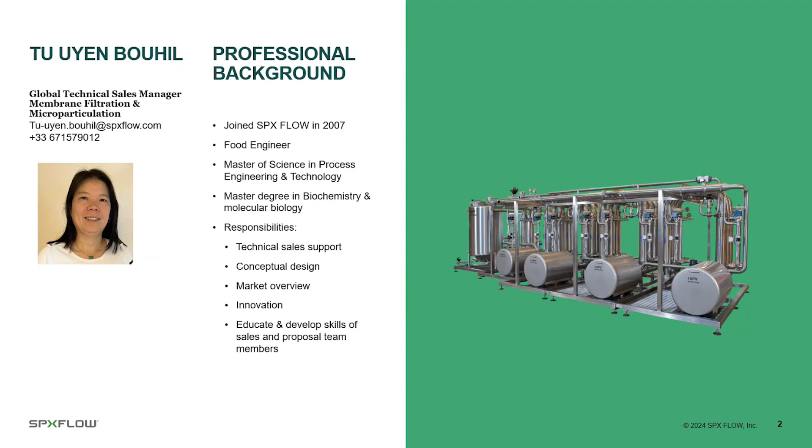So let's get started with a discussion on revolutionizing your dairy production with advanced milk fractionation. Our purpose at SPX Flow is to improve the world through innovative and sustainable solutions.

Today's agenda: we will have a quick overview of the milk ingredients market forecast from 2020 to 2025, ways to produce milk ingredients, why and how we will use milk fractionation to obtain flexibility to innovate and improve your recipes, key drivers for dry and wet ingredients, and finally, the SPX Flow fractionation solution.

At SPX Flow, we understand that quality, cost, and sustainability are the primary drivers for you as big players in the dairy industry. Our milk fractionation technology offers a complete end-to-end solution, creating lean and green manufacturing by reducing cost, materials, downtime, and utilities, by improving plant consolidation with optimization of the process, scaling production with fewer lines, by increasing production equipment flexibility, and by reducing and improving the wastewater stream.

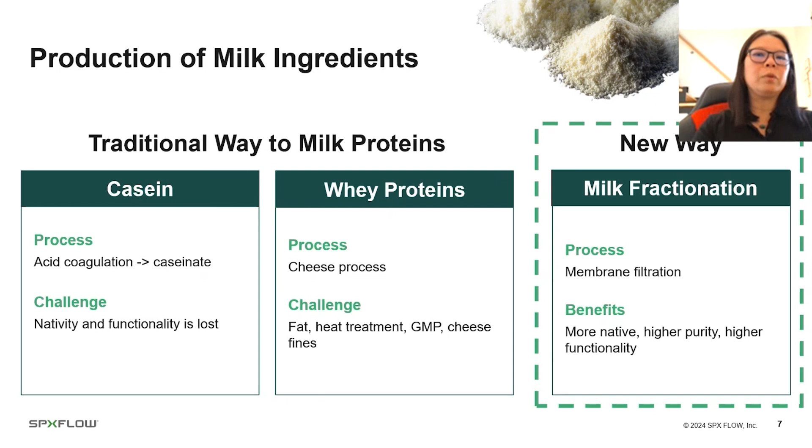With this new way to proceed, you will get fantastic benefits as it is a native form with higher purity, functionality, and is more digestible. Of course, this gentle way offers great advantages compared to the traditional methods. But it is not the only one that you can achieve with membrane filtration. We can mention the top 5 reasons why investing in milk fractionation is the most important thing for future dairy manufacturers.

Primarily is diversification. Milk fractionation allows you to produce a range of value-add products with the same equipment. Thus, a broader portfolio helps meet the various preferences of consumers and opens new market opportunities.

Secondly is increased profit. Milk fractionation adds value to the milk by creating higher margin products. Thirdly is enhanced competitiveness. Milk fractionation enables you to differentiate yourself from competitors by offering unique and customized products. Being proactive to market trends helps you gain a competitive edge in the market.

Fourthly is better utilization. Fractionation allows you to efficiently valorize milk to the last drop. This minimizes waste and maximizes resource utilization, leading to cost savings and improved sustainability.

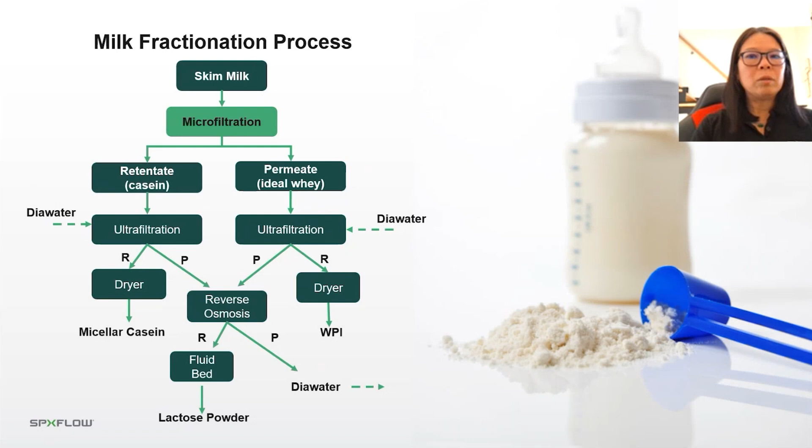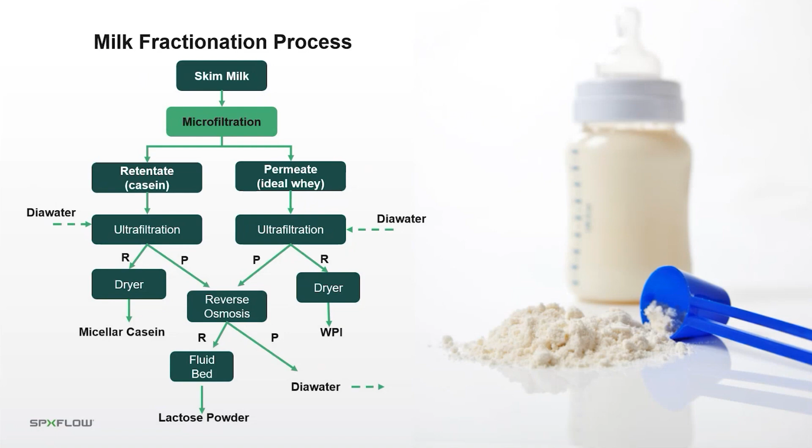The next step is to reach the target concentration level and purity with ultrafiltration. Milk ingredients such as micellar casein, milk whey protein isolate, and lactose can be manufactured in both wet and dry forms. How is milk fractionation possible?

Liquid milk and whey are suitable for the membrane filtration process thanks to their low viscosity, high water content, and because they used to be high volume bulk materials.

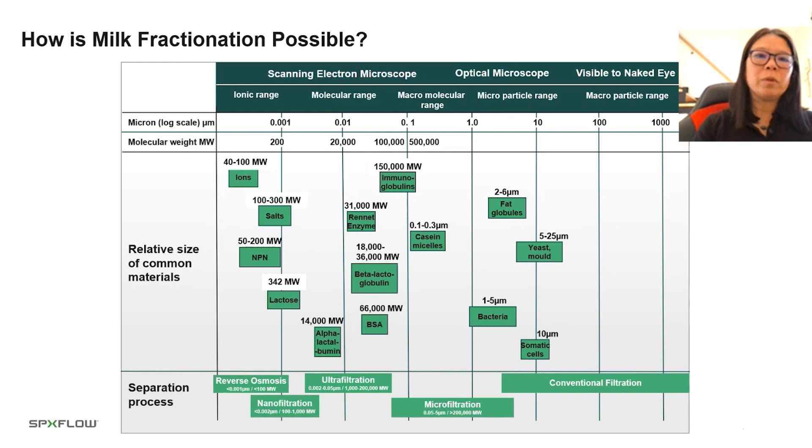The milk components can be easily fractionated due to their size. You have small molecules or ions like minerals and lactose, large molecules or proteins including calcium phosphate, and microparticles or fat globules, somatic cells, bacteria, or large aggregates. The membrane pore size falls within 4 main categories: reverse osmosis, nanofiltration, ultrafiltration, and microfiltration.

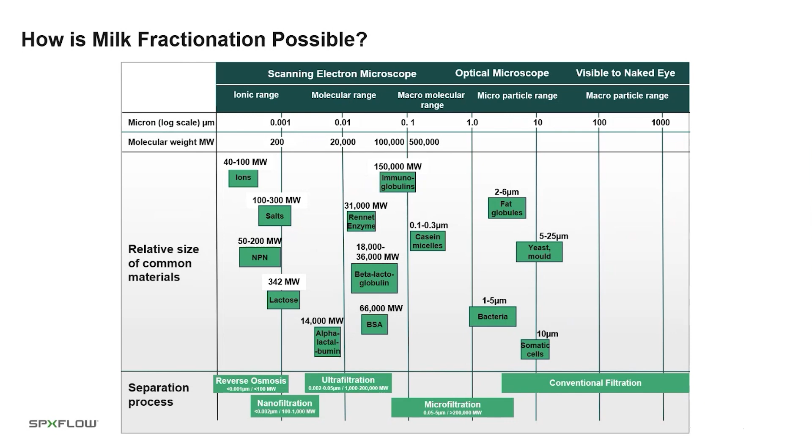So with membrane filtration, we can separate milk and whey components into smaller fractions. Each fraction can be used as a building block for new and innovative recipes. How does it work exactly?

Fundamentally, membrane filtration is a pressure-driven technology that uses specific membranes with different pore sizes. The pore size is indicated by a cutoff value for a particular membrane. In order of increasing pore size, membrane filtration methods include 4 technologies: reverse osmosis, nanofiltration, ultrafiltration, and microfiltration.

Reverse osmosis is for concentration of virtually all suspended and dissolved matter. Nanofiltration is for concentration of virtually all suspended and most dissolved matter. Ultrafiltration is for concentration of suspended proteins and fat. Microfiltration is for concentration of bacteria, fat globules, and large protein aggregates.

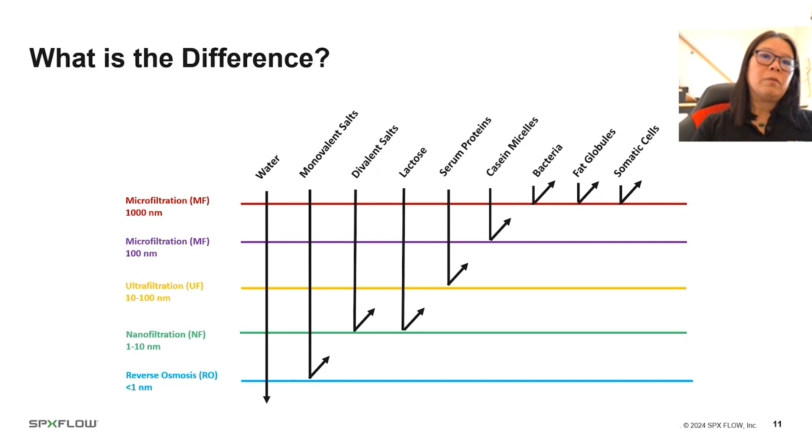As you can see, for the main milk components, membranes are usually in the ultrafiltration range. The ultrafiltration cutoff value allows components such as lactose, lactic acid, and dissolved minerals to pass through the membranes as fat and proteins are concentrated.

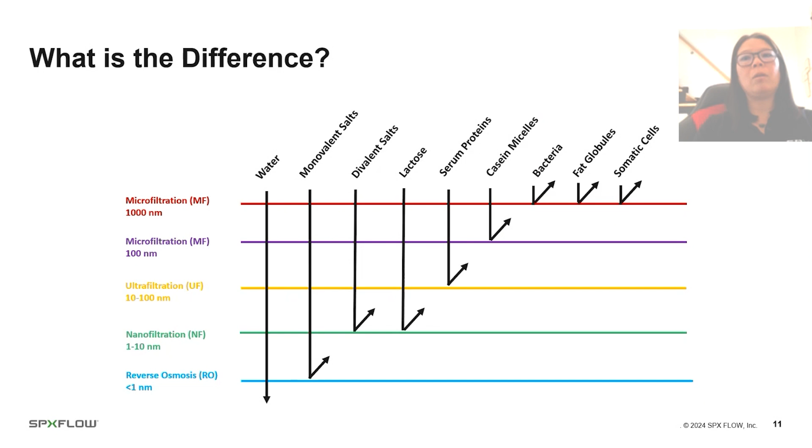To go further in this valorization, functionalization is also essential to unlock the full potential of your milk components. By modifying the functional groups of milk molecules, we can develop new properties and behaviors, opening a world of new application and innovation, such as being used to improve the texture, stability, and flavor of food products.

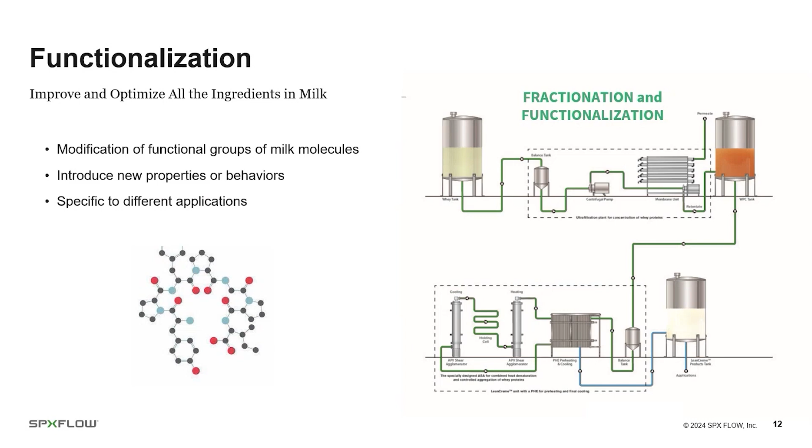Microparticulation will bring functional properties used for dairy and food products, such as a creamy mouthfeel particularly in low-fat products, water binding, improved texture and viscosity, excellent emulsification properties, stabilizer properties, and of course high nutritional value.

In order to stay ahead of this growth and take advantage of new opportunities, dairy producers are continually seeking flexible and innovative ways of making clean label products that are more sophisticated without compromising on taste and feel. It is the reason why SPX Flow innovates with a new concept of milk fractionation solutions that provide customers with a versatile solution to meet market change and the competitive landscape.

With this multidimensional approach, SPX offers you a very flexible production tool that can adapt its output according to current needs, but also for future development. SPX Flow's strength is also the ability to provide end-to-end processes and to boost a wider portfolio.

By the functionalization of the end products derived from this fractionation process, as casein, which can be used for cheese or yogurt, whey proteins which can be microparticulated and used in cheese and high protein products, lactose to make lactose powder or GOS, until the last drop as salt, minerals to make sport drinks.

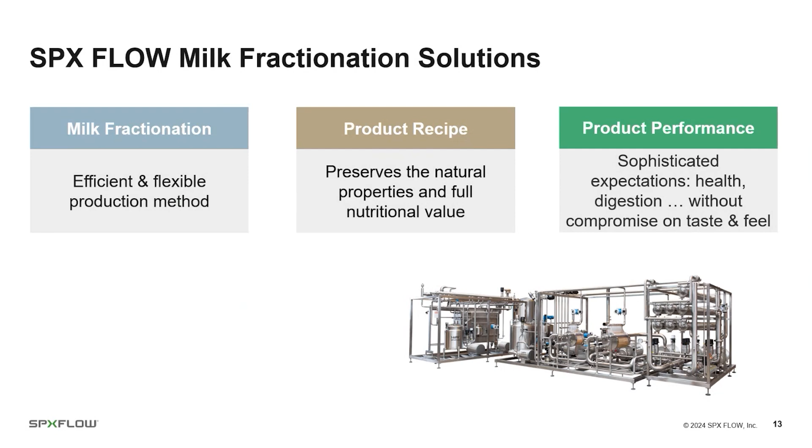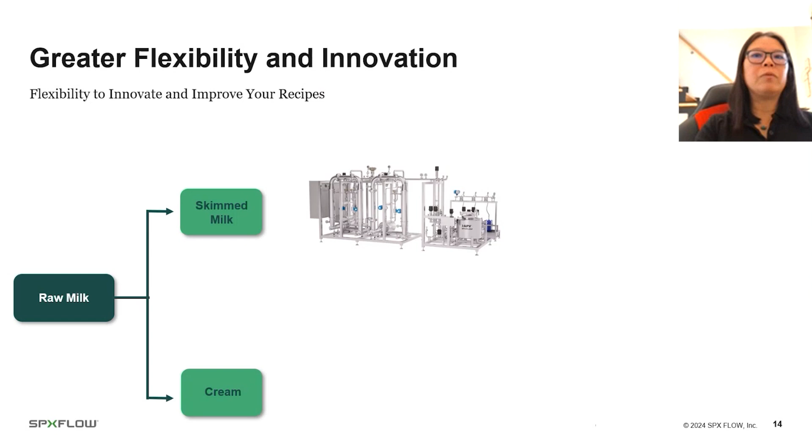So using advanced membrane technology to fractionate and concentrate the milk's native components preserves the whole proteins, which allows us to maintain higher quality protein content while preserving the natural properties and full nutritional value.

This separation of milk components allows for the customization of a range of dairy products, creating a new world of possibility for you, and can be used in various food applications including sport nutrition, infant formula, and functional foods. By efficiently utilizing each component, you can tap into previously untapped markets.

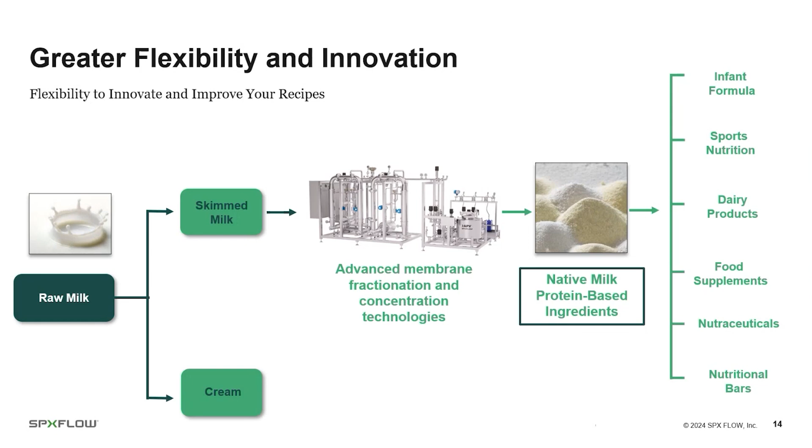As mentioned earlier, milk ingredients can be manufactured in both wet and dry form. Key drivers for dry form include long shelf life of 8 to 12 months, reduced transportation volume, usable in distant locations from the production site, less storage space for large quantities, simplified storage with no need for large aseptic space and lower building cost, balancing seasonal production differences, new market opportunities in homes and factories, suitable for retail pack and institutional sales, and dry mixing and over-customization options available.

On the other hand, wet ingredients also have a lot of benefits, like quality and functionality by simplifying process, improving fresh taste, and getting lean CapEx and OpEx. This means better functionality for end application, better quality control, tailor-made end product, clean label, and specific nutritional value.

We can also have cost optimization. Using fresh, wet ingredients rather than buying or importing powder at higher cost can save from 15 up to 40% in your formulation, giving an innovative product with the perfect combination of taste and functionality.

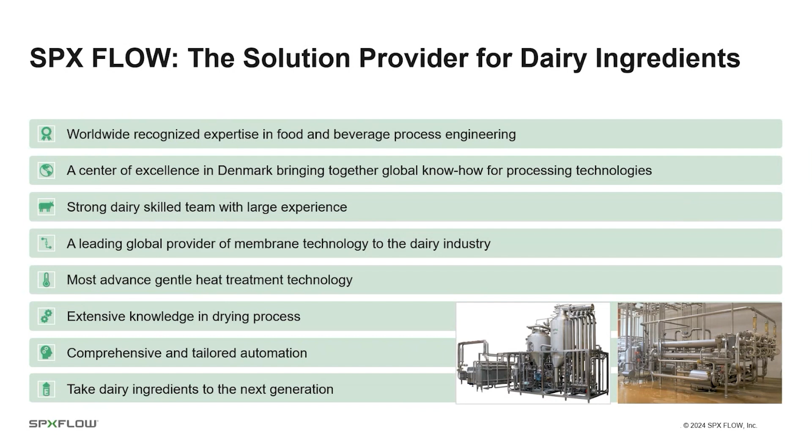Combined with our comprehensive and tailored automation, SPX Flow can support you to build a relevant and consistent solution end-to-end process. SPX provides all key technology for end applications, like UHT, evaporation, homogenization, spray and fluid bed dryers, mixers, valves, and pumps. These components are supported by SPX Flow's full lifecycle approach concerning services and spare parts.

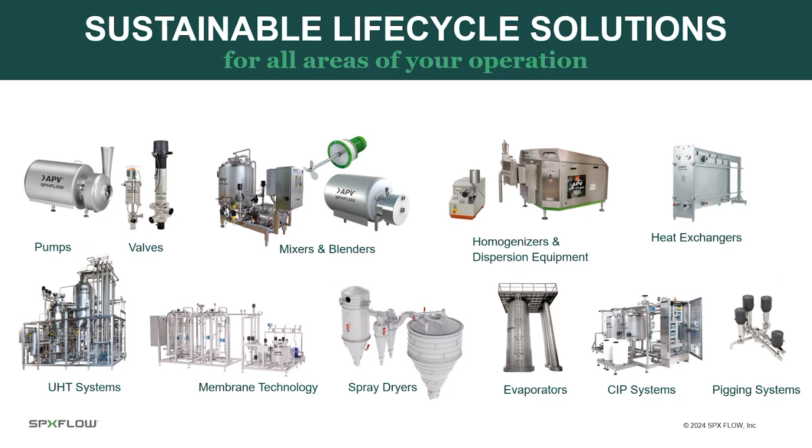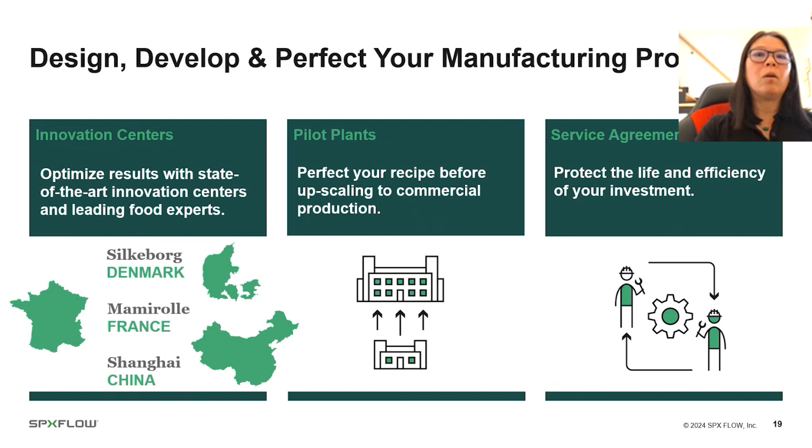We welcome you to our facilities to try new recipes, or in many cases, you can rent equipment from these facilities to test in your own factories and labs. Of course, we can also test liquid food, plant-based in this case, for example.

Our recent success story on this slide represents both possibilities, wet and dry ingredients, produced by SPX Flow milk fractionation solution.

Case story 1: a global leader in Spain, with a capacity of 1,340 tons per day of skim milk. With the fractionation process, they get dry product with MPC 60, MCI, WPI, lactose, and regenerate water through the process to be reused as Diawater and CIP water.

Case story 2: a global leader in France with the capability of 220 tons per day of skim milk. With our fractionation milk process solution, they produce liquid products like MCI, WPC 80, lactose, demineralized D90, and recover water for Diawater and CIP water.

So you can see that the benefits of milk fractionation extend far beyond improved product quality, providing natural, nutritious products with enhanced functionality for the end product.

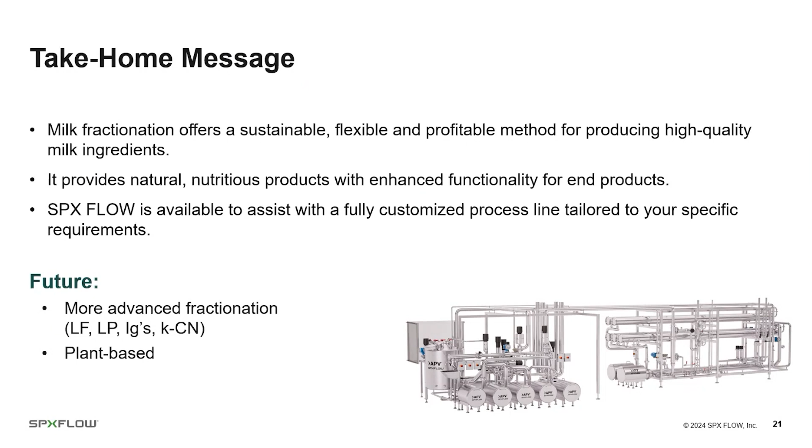SPX Flow's dedication to sustainable practice is evidenced in our consistent design for energy efficiency. By minimizing energy consumption while maximizing yield, the system not only benefits the environment, but also translates to significant cost savings for our customers.